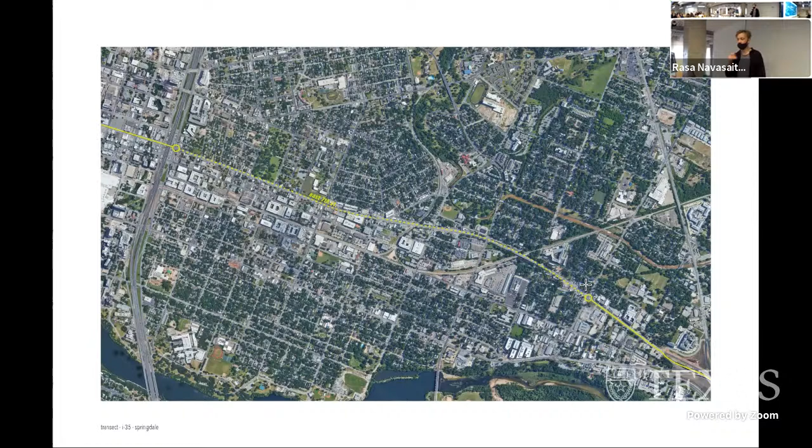If you look at the condition of East Austin, we can see this idea of urban ecology being challenged already, looking to the north side we see this more residential area, which is covered and shaded by trees and has plenty of landscape. And then to the south of East 7th, we have a much different condition where current densities are happening, and we're beginning to lose that landscape.

So we wanted to really challenge the students in the studio to begin to integrate that sort of landscape condition we see here into a denser condition.

And so as groups, the students went through and did different types of site analysis, looking at where these natural voids were happening, and where humans had access versus not having access within East Austin.

And then they would also model these case studies, looking at how do we introduce these voids into a typical housing unit or apartment. And so these are different studies from the students.

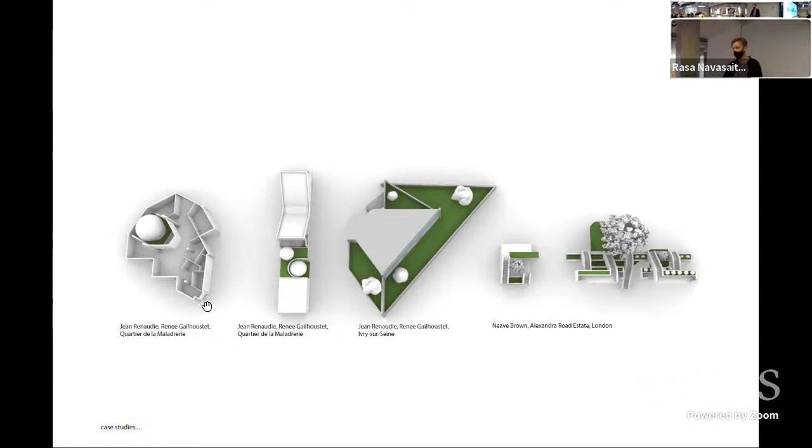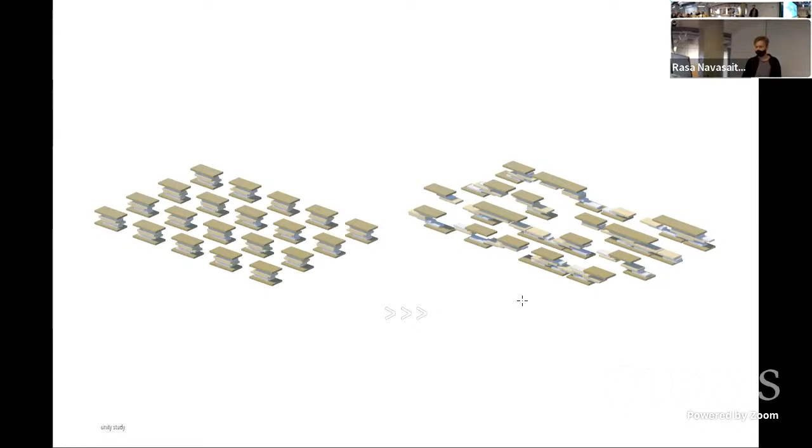And then we also began to introduce them to Unity, which is a 3D software that essentially looks at these different building parts and begins to move them, using a script to see how these relationships happen, so we can consider these parts as public or private, and then using the 3D script, we can begin to understand how those spaces interact. So the students did a little bit of studying within that and some sort of research by design through that.

It was more of a jumping off point for them. In the second half of the semester, we really wanted to focus on how we take those ideas from this digital, computational process and begin to translate it to a new type of building.

This quote by Mario Carpo begins to look at that. He talks about not designing a building using digital tools, but rather designing a building that could not have been designed or built without them. So we begin to consider these building parts as almost like the different letters in an alphabet, and think about how these letters or building parts combine to create an unlimited amount of variation and new types of housing technologies.

We can see that here in some of the students' work, where they design these building parts, and then their studies aggregate to create new types of housing that introduce natural voids and landscape. These studies would later go on to develop into a more realized building project.

So yeah, that's it. Great.

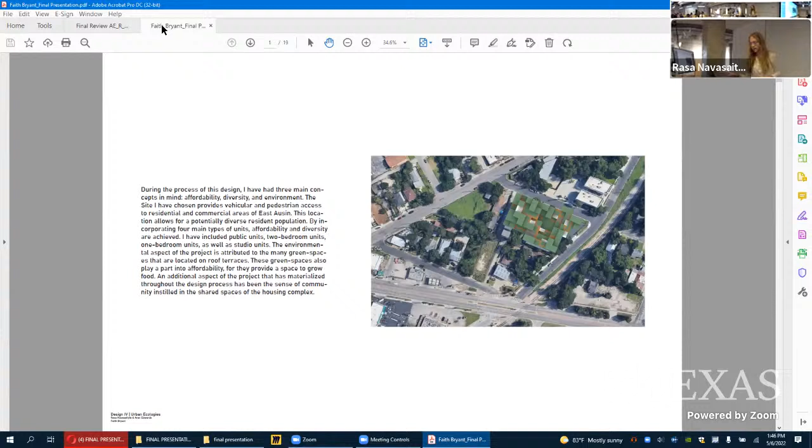I'll get a bit more into the site in the next few slides. This is just a rendering of it sitting on a Google image.

So the site I chose, I wanted to set my building in a place that would combine those two and sit right on the axis of the private and public spaces.

The site I chose is on the corner of Northwestern Avenue and Coronado Street right here. I chose this site because it has good pedestrian access, vehicle access, it's right near a commuter rail, and it's right across the street from the HEB, so they've got good access to things that they need.

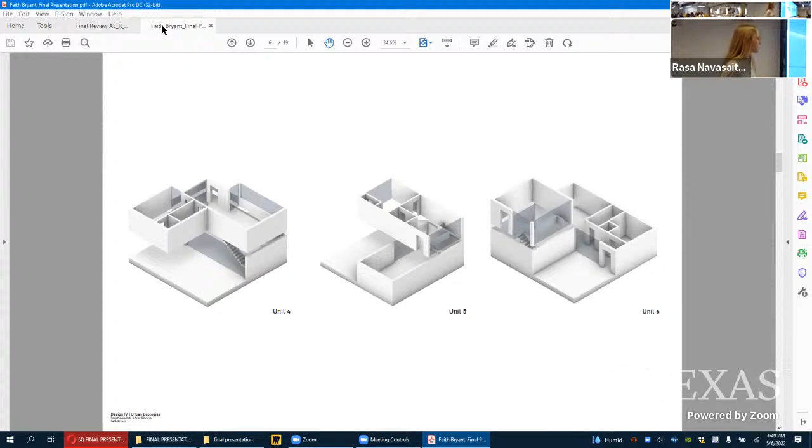These first two are both studios, and that third unit is a one-bedroom. I have nine different unit types, and they're all repeated several times, but the interiors are unique to each unit based on where it's located in the mass and how the windows are facing and where the doors are located based on its placement.

I have a variety of studios, one-bedroom, two-bedroom, and a couple three-bedroom for some larger families. That's how I plan to accommodate diversity and affordability. With some smaller units you have lower square footage so you can afford that better, but also with bigger units you have a more diverse population that can live in these spaces, from a single person to a family of three or four people.

So this is just all that I have up there if y'all want to take a look at that. That is just downstairs of one of the units I have.

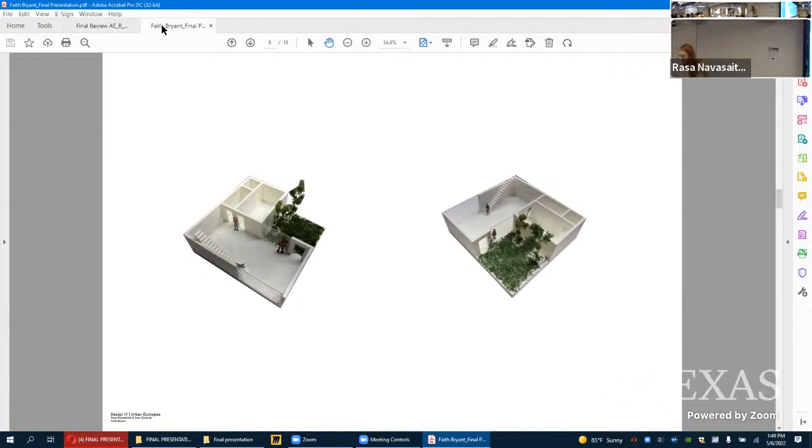And it's a courtyard, central green space area. I tried to incorporate as much green space as possible.

This is just a section of the build on that side, and the units are placed with the modular dimensions. They were easy to kind of place like Tetris pieces. And down here I have my elevators and main circulation core, and it goes up to each floor.

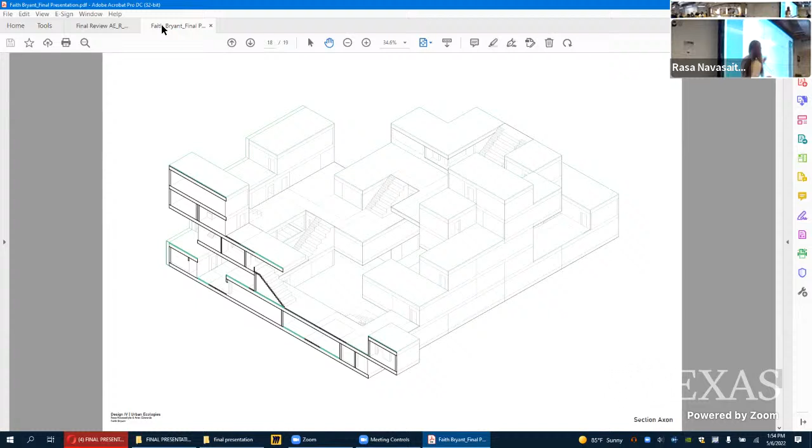My next section cuts in the opposite direction, again showing that courtyard on the bottom and the different levels. And here are two experiential views that still need work, but okay.

Thank you. Is there a site plan? Yes.

It's missing the trees, but I placed them here. There are trees along right here, and then I would plant some more.

Are there sidewalks in the public thoroughfare? Yes, I believe that's what these are. And adjacent to your site, are there sidewalks? Oh yes, there should be.

So the model is just half of the project. Yeah, this is just a chunk of that. And is it how it looks in 3D, or maybe in the middle—does this terracing go up again? Yes, so in the middle there's a courtyard that goes all the way to the bottom, and then it builds up on the outside.

How many total units? 27. Is there parking as part of the program? No.

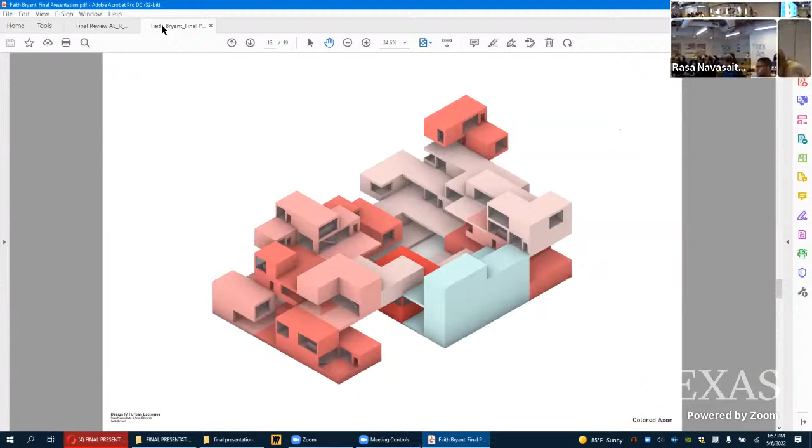Yeah, that's it. Go to the first floor plan. There you go. Okay, so it'd be nice if you had shown the intersections of the streets on the ground floor plan, so you can see the streets and how they kind of wrap around your project.

It helps us evaluate the project. I think a lot of the success on a project like this has to do with the relationship with the ground. It seems as though I don't know how much value you gave to that, how much of it was criteria that played into the project, but whether or not it was an assigned criteria, it's one you have to bring to your project.

Because you could have a project that's otherwise successful and clever in the way you aggregate and make connections between units, creating public spaces outdoors, all those things, but the success is going to be based on how good this thing hits the floor, especially in an urban context like we are here. It's a city, so you have fairly long walls on the sidewalk.

So imagine one way to help is to think about things like imagining yourself walking down the sidewalk. Right? You want something pleasant, don't you? You want to see people drinking coffee or whatever, a bakery, a cafe. You want to see life on the ground. But you don't want to see a long 20-foot wall and opening, and then another wall and glazing.

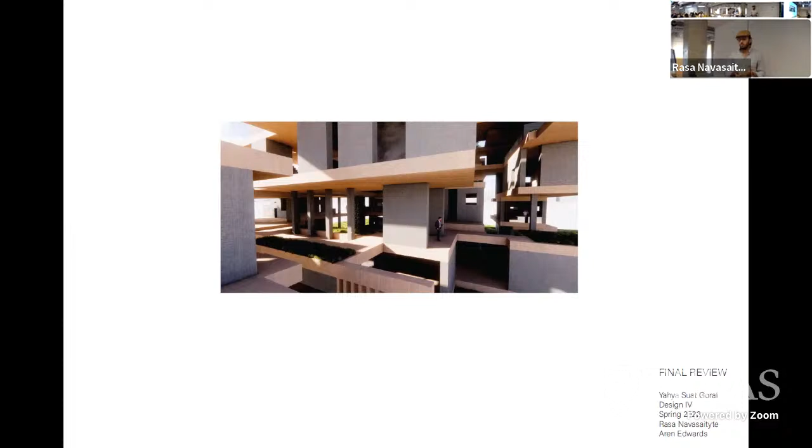Our project was about urban ecologies, and we had research at the beginning of the semester about the site plans. We were researching how the site looked in the 1900s and 2000s, and then we decided to pick a site and work on it.

So I decided to pick this site right there. There was a construction on that site, which is stopped right now. Nobody used that site, and it was nearby 7th Street. That's why I decided to choose and work on that site. Also, since we were supposed to build an apartment unit, it is a very nice spot to work on.

A little bit about the research: at the beginning of the semester we had to research some sites in the downtown Austin area, and our site was 7th Street. We researched the public spaces and commercial spaces, like the buildings and residential buildings, and then I decided to choose the place where a lot of commercial buildings were.

This is the unit and site relationship. This part is 7th Street, and they're all apartment buildings nearby. Also there was a school, the college — I can show you from here — there is this Huston-Tillotson University. So since there is a college in this site, I decided to put my apartment unit there so students can live there as well.

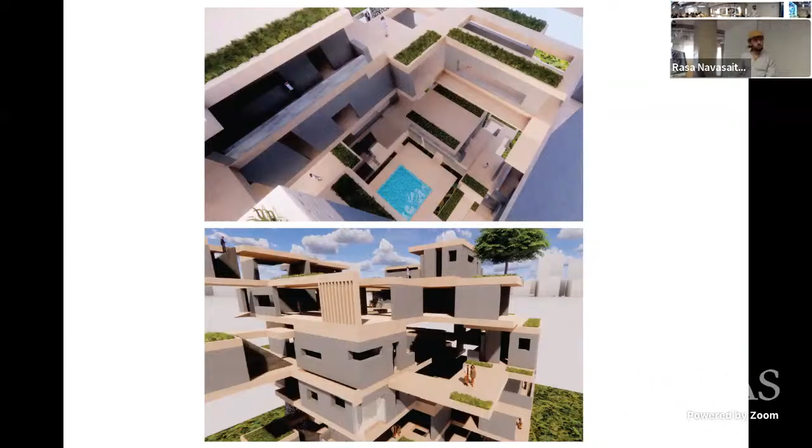So what is your basic unit, the unit that you multiply? The units I'm showing right now. Okay, I see a lot of them, trying to figure it out. So this was the main player? Yeah, I'm just going to show you the second one.

At the top picture, you see the top view of the building. My main purpose before I started the project was putting a lot of shared spaces so people can meet and gather together rather than just solid units. So I have a lot of shared spaces in this apartment, and also singular and two-king bedrooms as well.

So these are just some shots. As you see at the top picture, there is this singular unit, and behind it there is a two-unit apartment as well, and the one at the bottom is just a gathering space and the apartment office. I was just thinking about it, and this is just the outline of my apartment.

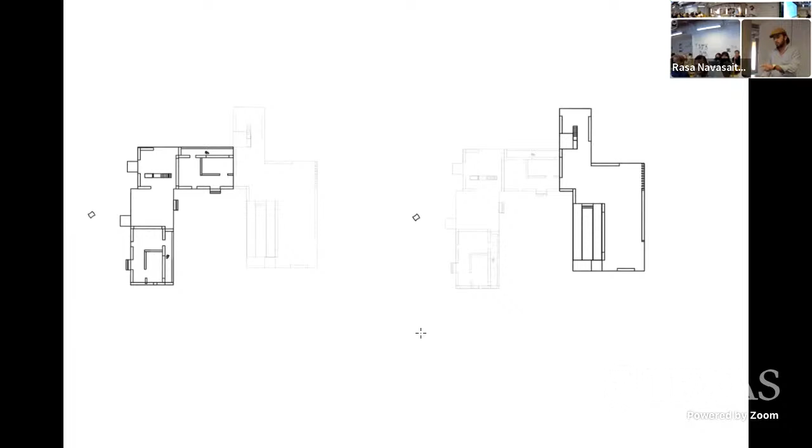Is the public space like a living room? Or is it more complicated than just assigning rooms? The thing is, here there are just singular units, so everything is in one unit, just one for one person, each unit.

Is the public anyone can go there, or is the public part of a private unit? So anybody can go to the public space, and the private space is like a hallway leading to the living unit. You might just call this communal space, but you have to describe it really succinctly so people understand the distinction between the two.

Did you build any physical models of this? Yeah, I have. This is the study model. This is the public one, and here it starts the private ones.

These are the section cuts. This one is the section cut of the building, the axon section cut. As you see here, this is the public space, this is the public space, right here, public space, and there, that's how I connect the private and public spaces. This is the section cut that I got from this site.

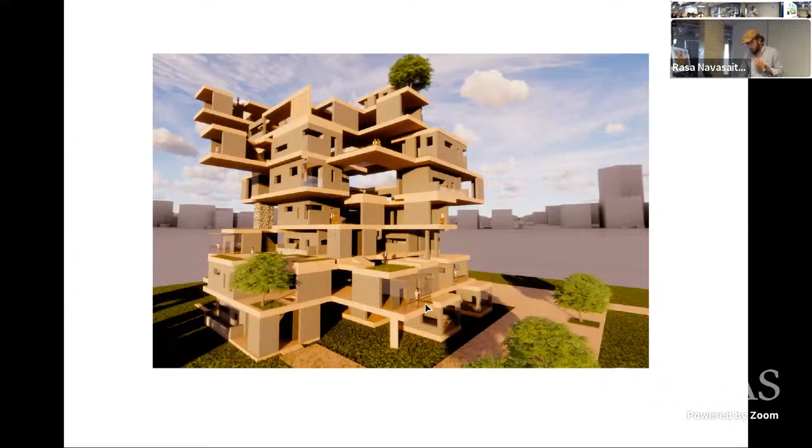This one is just the perspective image. Hang on with this for a second. When I'm looking at this, I'm trying to untangle what you or your machine were thinking as you were moving these pieces. Is it about taking the horizontal unit and shifting it off a certain amount in order to give you the void in between? I'm just trying to understand what you were thinking as you were moving these pieces.

I had two types of units, and I was just playing with them on each floor, putting them in different places. In the emptiness, those empty places, I made them public, for people to gather. The green spaces, I put them to have more appearance of a gathering space. And this elevation right here, you can see this is one of my units, and here you go to the next unit, and these are the other units right here.

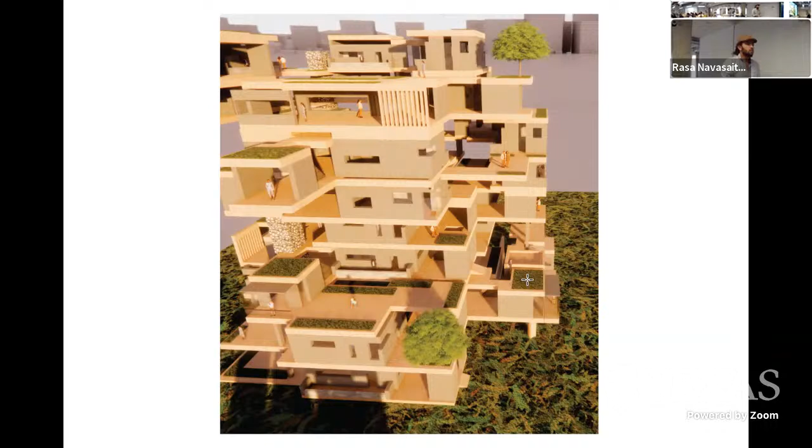And in the middle, as you see, the middle of the apartment is empty. So do you have an image that you can tell us what you were just telling us? I think you're generating a lot of very interesting relationships. It seems to me that it's hard to figure out which is the one that you prefer, which one do you like, which one is working, which one is not working. I think you have a lot of possibilities, but I want to know what you think.

Okay, so this is the top view of my model. As you see, my human scale here. This is the public, that's what I was trying to say. And there is this stairs goes up, and this is the private space. And when you go here, there is another public space again. And when you come here, there is another private space. It goes circle. So here, this is the public space, and you go all the way there, there is my private space too. And this is more about like for people to gather, basically, instead of just whole apartment.

Honestly speaking, it's very confusing your presentation, or how you represent the project. You're jumping from kind of renderings or subjective views to a site plan, to a diagram, to a plan, which is not really a plan. The drawings are very incomplete. Like when you have the plan, even the walls are not hatched. They're not embedded in the context. I don't see how your project actually sits on the site in a plan or in any section. The renderings, the part where you cut it, is even not showing the full building. The perspectives are where like a drone would fly, but not a person would stand. It's very difficult to understand actually the program, the space, and the observation for that project.

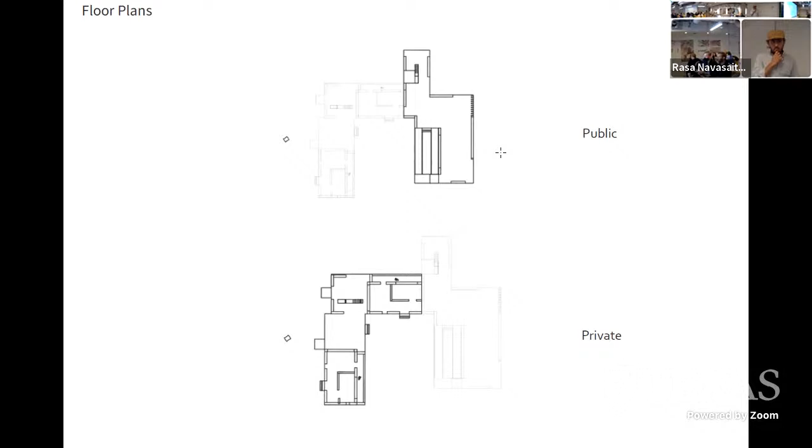I think we're just lacking context. This is essentially where we were three weeks ago. You got to a point of making a composition that you liked, and then resolve it. So I think you just need to push it further and think about how do I make this more realized as a building.

Like John was saying, just start drawing in people. How do they experience it? What's happening in those spaces? Right now it's just these two foot thick walls that are holding up a variety of different spaces, and it's a little unclear as well.

But look, even as, I mean, it's clear as an open studio, so it's kind of messy. I'm okay that it's not 100% works because of the complexity. I'm not okay with that - I can't read the drawing.

So when I see a plan where the stair has nearly the same width as a wall, it can't work. As long as the basic elements look like they work, I can assume you can figure it out later, that it needs more projection. But the ideas are there.

This one, the 3D sectional cut, has a great quality, like this courtyard and so on. So when you show this with the swimming pool or this entrance area, you put out some atmospheres. But again, when you show three different site plans, they all have different orientation, different shading, and also different geometry. Then it needs more care in simply elaborating the drawings.

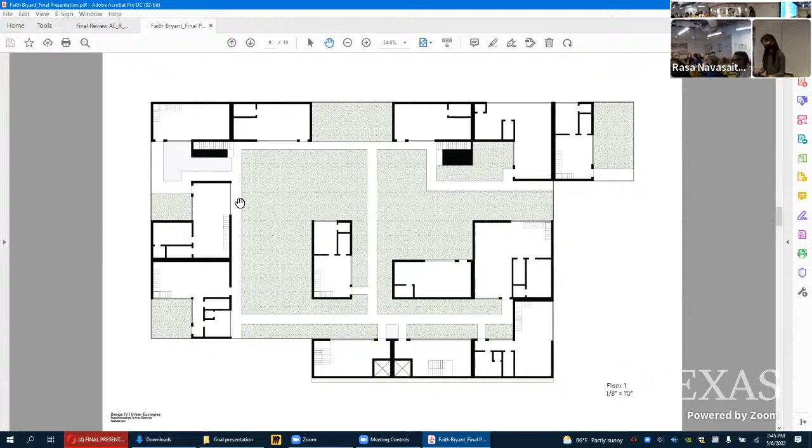That's how, sorry, I'm saying it louder so they can get the message. Yeah, rolling your eyes, I wasn't actually yelling, just saying it loud enough so everyone can hear it. I tell my students that all the time. It's easy enough to get.

Yes, maybe at a minimum, tell us where your drawing is so we can figure out, it would help us, because I've been trying to find them all along. It's helpful, because our job is to see the big picture, but we only can see one at a time on the screen, so this is a challenge.

But you gotta figure out, I don't remember them all, but hey, go back to image number 14. Which, before you start - sorry, the one thing about Zoom that surprised me, reviewing projects on Zoom, is having a second monitor and the entire presentation on PDF. So I can see the image the student wants me to see at any given moment while they're speaking, and I can scroll through the whole thing. And at the end of the review, I said, go back to image number 5, and the whole thing would come together. It was actually like an amazing antidote to the limitation of the single image digital presentation. We don't have that right now.

It was great, like cinema. It was amazing when you got the whole thing coming together on the screen.

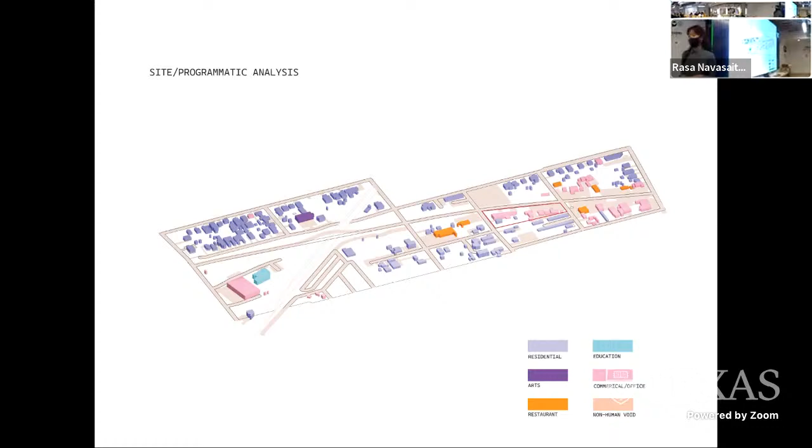So I have this initial concept, I like to experiment and play around with in Unity, and I have this idea of shifting spaces and overlapping circulations, overlapping private and public spaces. This is where I came up with this physical model, and basically some overlapping areas could also become like landscape or dirt space for planting - this is just a conceptual image.

And how I started differently, I started creating shells that can slide units in. Okay, it's kind of not moving, but I create shells and units, and I create a diagram of constraints

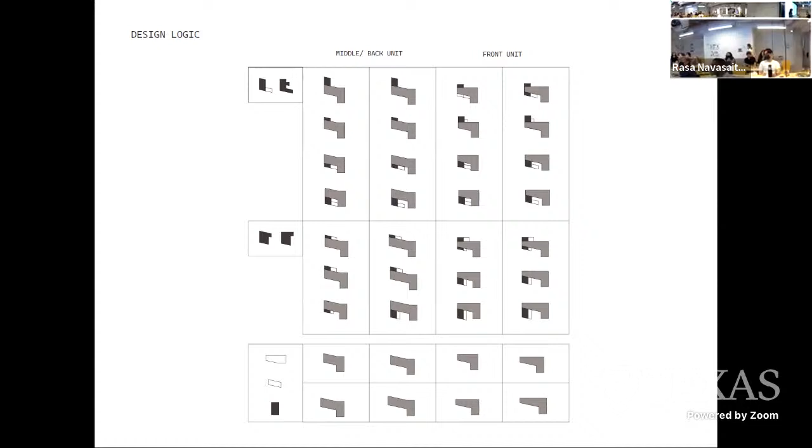to form my aggregations. And these are my units, and those light gray ones are my shells. And I'll see what it presents. Oh yeah, okay, it's moving right now.

So basically it moves like that, and then it's how the units shift into my shell, and that's just a top view. I couldn't really get into work on Illustrator, so this is how I form my aggregations

by shifting plates and units. So my units come after I created my shells. And that's my first floor plan that I came up with, some main circulation coming from both sides, whether it's facing the streets or the residents in the back.

I have a total of 5 floors where I have main two clusters, one on the left, one on the right. One is a little bit larger, and the cluster on the right stops at the 4th floor.

So here I have my second floor plan that has an intersection of the plates that creates more public spaces, and then the 3rd floor where it's mainly units - oh wait, I have 2 third floors, sorry that's a typo. And then my 4th floor, some greenery space, and my 5th floor. Sorry, those are typos.

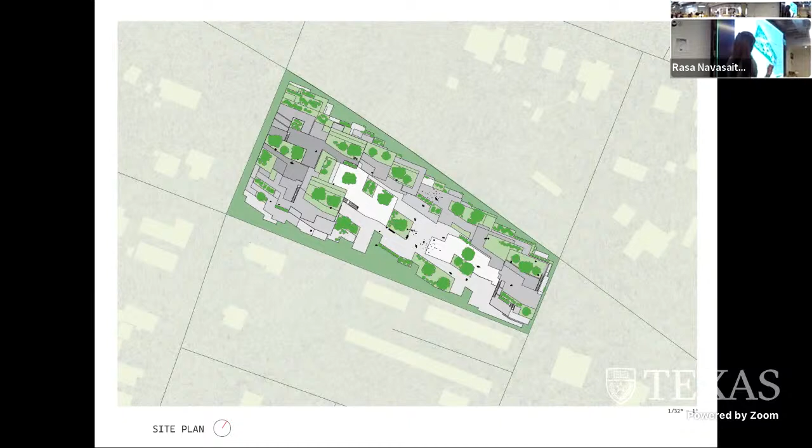And as we move up the floors, it becomes more private, but on the 1st and 2nd floor those are mainly public. And this is a site plan that I created just to show different elevations, that as you move up, the shape becomes darker, the gray shape.

And that's my overall aggregation that I came up with by shifting those shells. And I did a section cut the long way, but it's not fully resolved yet because I figured that

the difference in shifting my shells creates problems when I design my units. And that's the section of the shorter side.

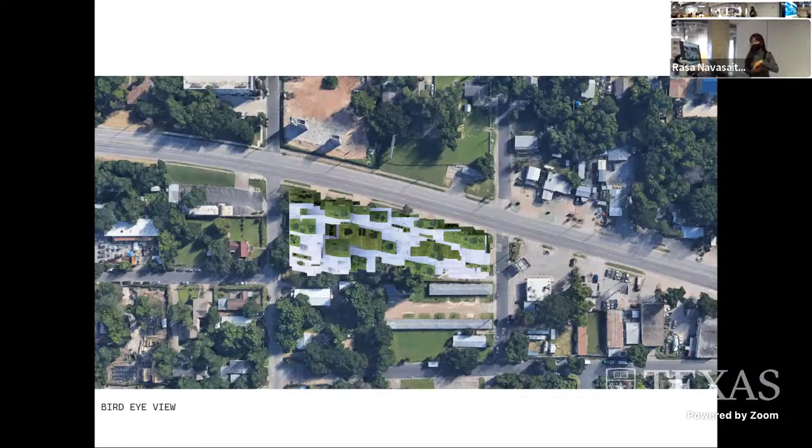And some detail shots that I have of potential activities happening on the 2nd floor. And the last image of some upper activities that you can sit and chill. And yes.

The model's a little different, is that right? Yes, it's just a study, like how it came up - my final aggregation. It's a little earlier and you have a little more density now, right?

Oh, this is half of my site. This is half of the size. They didn't have the model. It's twice as big as that. Yes, it's quite a long- I have quite a lot of units. I realized my site is pretty big.

How many units do you have? Oh, okay, I have 50 on the ground floor, and then 30 something, and then 7.

Do you have a plan for like a unit type? No, like beds and window, kitchen, restrooms and all that - that's something I haven't figured out yet.

How big are the units? Oh, units range from like 500 square foot all the way to maybe 900 square foot. So, I mean, it's reasonable sizes.

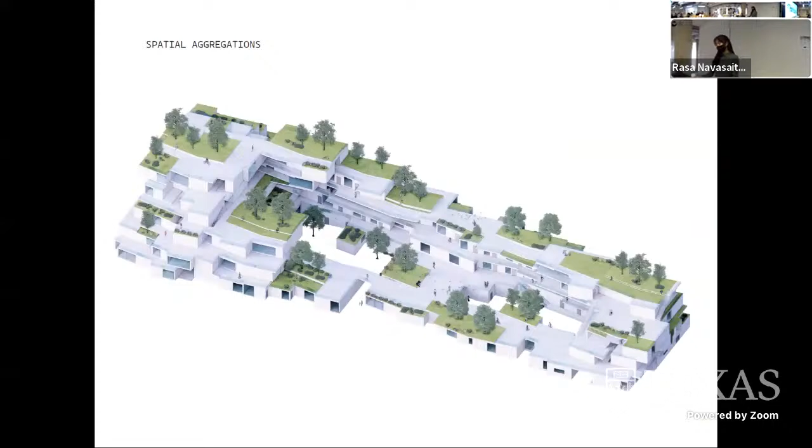One thing I developed on my ground floor plan is, I do have regular units, but I thought of something that can welcome people in rather than prevent them from coming. So I have a small library at the bottom, in a large space at the intersection that doesn't get much light if units were there, and then I was thinking of having a daycare in the middle.

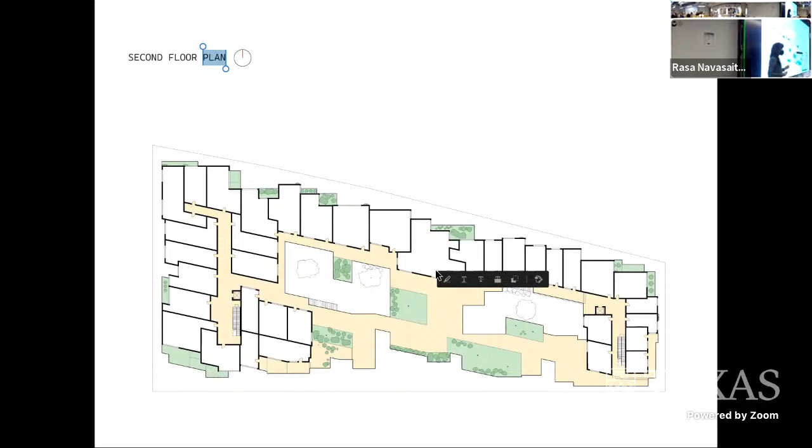It's very important that you say this. And I think even the first floor, I wouldn't see them as apartments at all, because people would just be crossing right in front of your main window.

On the first floor you have one-side-ventilated units, which I would always avoid—it's not ideal because you get very deep floor plans, dark everywhere, and in terms of privacy people just walk in front of the window. In reality you'd have the curtains closed all day because you don't want people to see you sitting on the sofa.

But if that were an office or a small shop, I'd be happy if people looked in and maybe stopped by my architecture studio. So you could easily change the program, or change it with the floor height, offering more mixed use, which would probably be more appropriate.

A lot of really nice work here. I appreciate that you know what the density is and are addressing it. Tell me a little more about these investigations.

Yes, these are my early studies. Originally I was interested in shifting the plates and how that shift, along with the stairs, could lead into planting or seating areas within the units. That's where I started, along with thinking about a public space that could create this kind of circulation.

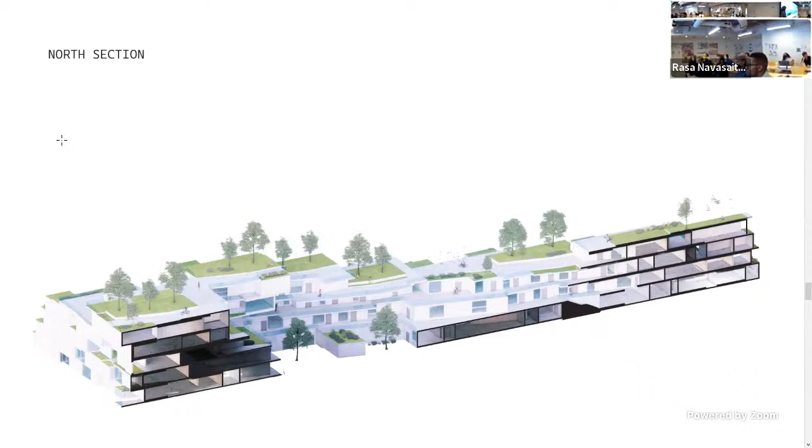But I like the sections just as a kind of drawn aesthetic object, I think it's quite beautiful. It could be a bit more informative, so just stretch it out with time. As I said previously, it would be nice to show the streets, how the thing hits the curb, the edge, and then maybe zoom out on that one and draw it regularly. But this scale of the long section shows a lot of nice intricate aggregations going on, there's no sameness in the projects.

I always like the 3D section, if you make it really 3D, now with computers, you can cut in 3D like a flat shot. So this is actually, when you really see it more as a landscape, when you open up the spatial complexity, and then you develop it really as a landscape, three-dimensional. It's really understandable how those movements go here for the project. So don't cut this really as a straight thing.

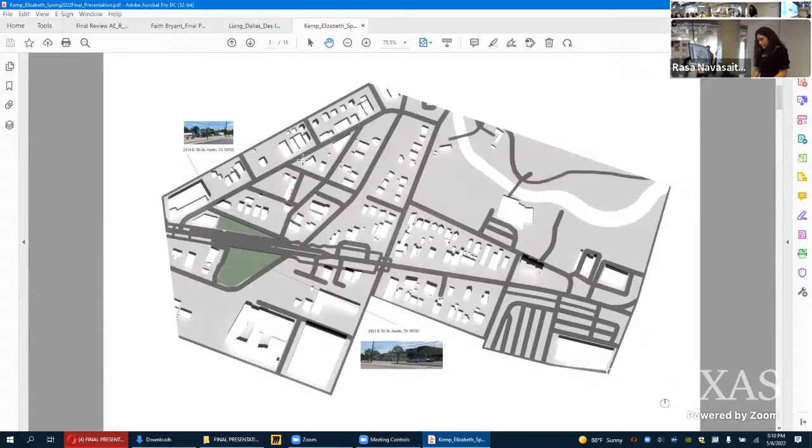I don't think this is the right one. Do you have the words? No, but I don't think this is the right file. I'm just wondering if he has the box open. Oh, here it is, okay.

Can you download this? It's just loading. Oh yeah, just downloading it. That should already be downloaded. Unless you uploaded it again. I think it wasn't the right one because I was missing one of my pages.

Okay, then just go to the downloads on the bottom, right here. Or do I go for the newer ones? Downloads, yeah, okay, perfect, there we go. There you go, okay, continue. Okay, so we got that working.

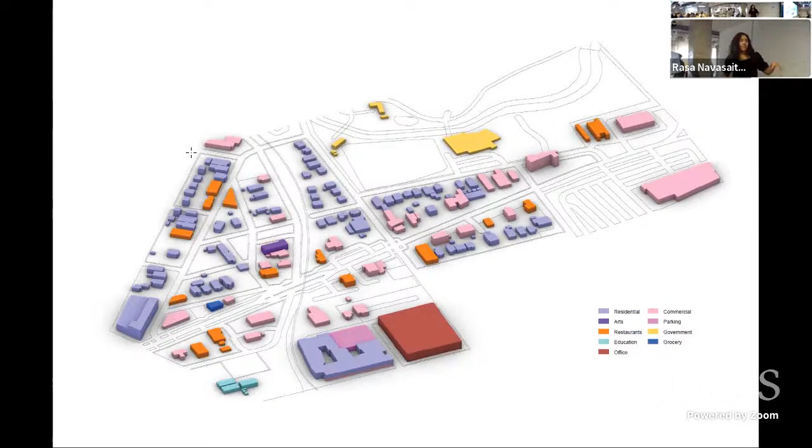So first I want to start off by talking about my site. I had the same zone that Faith had earlier, she went first, and she brought up the fact that we have a more residential northern side and a more commercial southern side. The point of my project was bridging, connecting these two sides of East Austin, and this program diagram came in handy for that.

The site I chose ended up being, pretty much, two different sites that cross over 7th Street. I thought it was a good area to pick because there's an elementary school down here in the south, cut off to the left. And then you have all these homes behind this bigger site, so it's replacing a gas station, a pawn shop, and an auto shop. There are a lot of them in this area, so I didn't think that would be too much of an issue.

When thinking about our design, I went back to the original concept models we had. In the Unity model we did, I was playing with plates and created these modules with random space inside, and this very direct type of circulation that wrapped around, and I made different connections with that.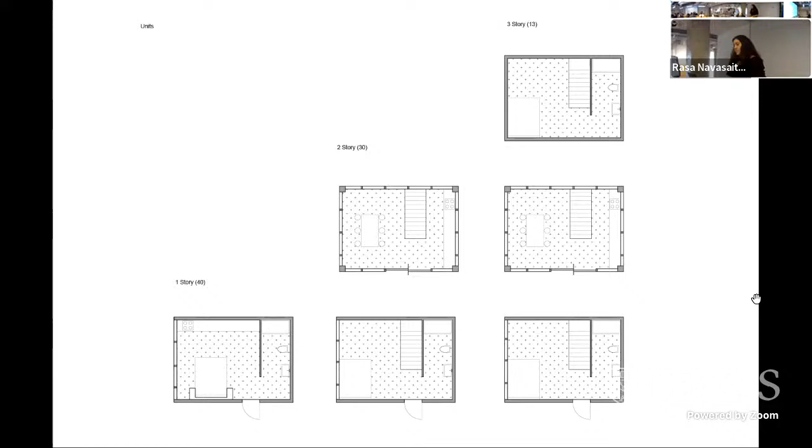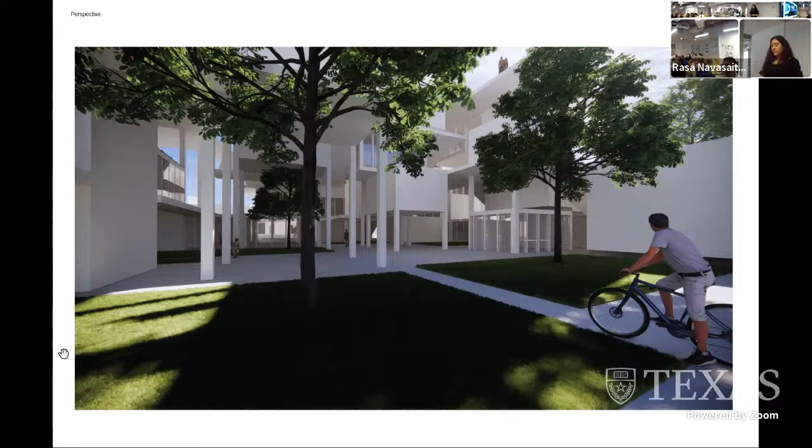How tall are those units? What's the space and what's the height inside those? The units are 17 by 22, and then the height is 8 feet.

8 feet? Are you sure? I think it's 8 feet. If not, it might be 9. I had to put some depth in for soil on some of these, so it might move things around. 8 or 9 works. Well, I'm looking at the proportion of the volumes. So you said it was 17 by what? 22. 17 by 22 by 8 would make them half much shorter than that. It could be 9. Okay, anyway. Yeah, proceed.

And then, oh, I went the wrong way. This is a perspective just approaching that coffee shop, and that's where the open space that I showed on the plan was. So some of these are raised, and it creates this tunnel where you can go through the apartments and reach the area behind the site.

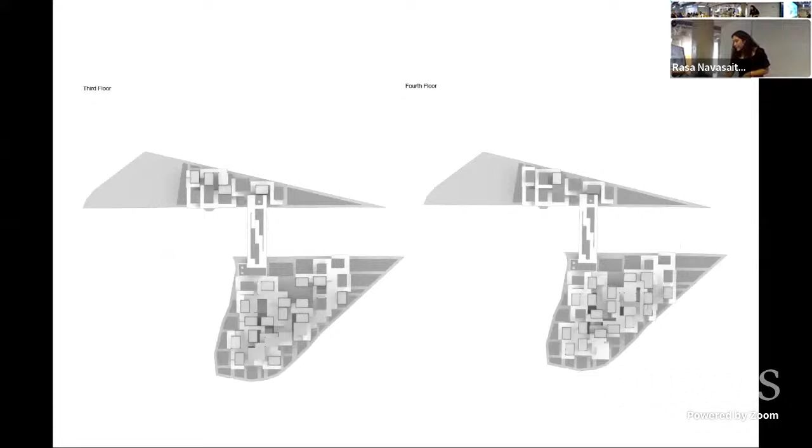I think that's the next step I was working on, because for some of the rooms on my plan, I started playing with interconnected spaces, but I just never got to develop them now. I did mess around with blending some of these together, and having some spaces overlook other ones, which is where I had maybe a section.

There's something really interesting about the hyper legibility of the modules. Back up one, please. This is the one where I'd love to see some of this erased, so that it has an edge that's missing. There's a little mini balcony, if these things actually connect to the other and start to connect vertically, some of these might read as just weaving. Go back. Yeah, there you have it.

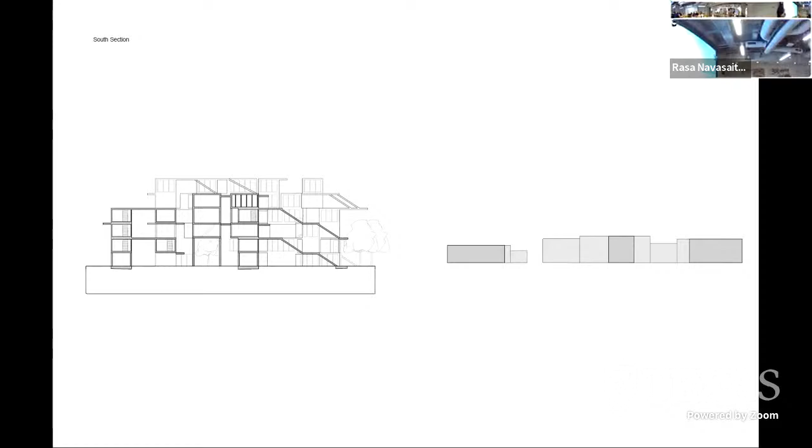This already doesn't look modular anymore. Outside, yes, but inside, not yet. Why is it not inside? Well, I see it before separating them distinctly. That's not inside. That's outside, why can't you use it?

Wait, sorry, what are you saying? Well, for sure you're using the space here. This is super cool, the courtyard, isn't it?

No, courtyard space, yeah, but my concern is that we would get a kind of claustrophobic modularity, where when you're inside the space you feel like, dang, this thing's small. So you have the opportunity with everything you're proposing to provide the antidote. It's like I never feel trapped in a corner, because I've got a piece of space that connects to the glass floor where I can see my room up above, but I still have some acoustic separation, and I can also see out horizontally at any moment inside any space. So I never feel like I'm in a box, even though, yeah, I'm in a box.

So there's an experiential counterpoint that you're providing. You've got that opportunity in this strategy that you're using right now. I think that'll help you avoid stacking and shifting also.

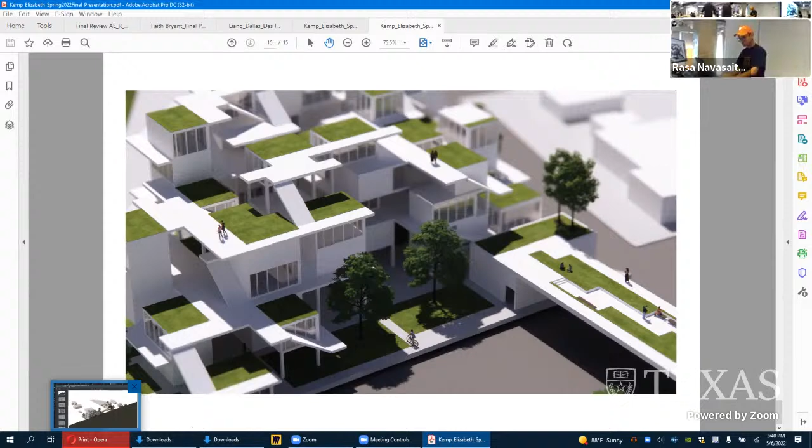Somebody come and help. Do you have box open, Baron? Yeah, it's on the bottom. You got a print, so print. I know, it's on one of those tabs somewhere. One of the other people too? Yeah, can you just take it and download them? Let me bring one of these out here. Okay, does that come off? Thank you, Jeremy. Of course. You want to stack them all? We can.

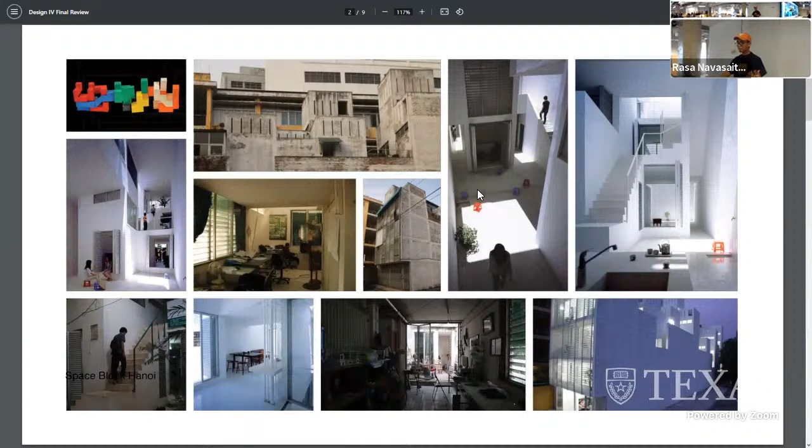I love the part where the light coming in, the little spaces, people sit here - like my auntie and my uncle sit here and gossip, or play cards or something like that. So I wanted to see how I can use computation and code to manipulate a cloud of modules and generate a form.

It was fun and all, but I think I couldn't control the code to get the form that I wanted, so I went completely opposite. Before that, the form that I got from the code generated something that felt a little too big, so I had to take that one.

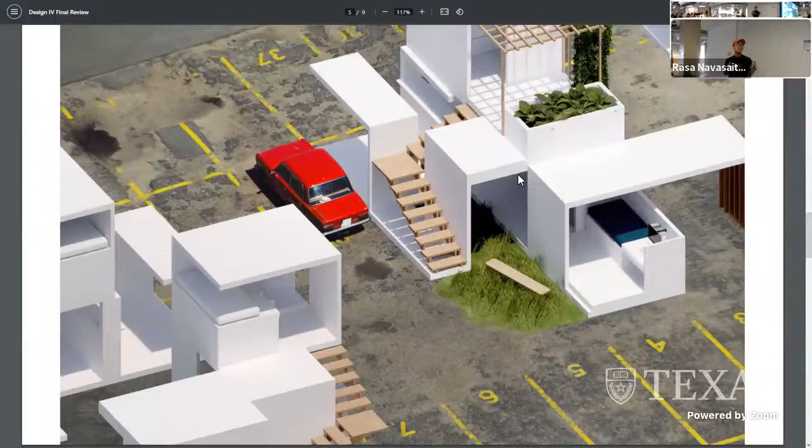I felt like it was a little too big, so I went with smaller modules that are more individual and personalized. It feels like it drops in and lives by itself on the site, almost parasitically, and that felt a little too small. So they start aggregating and just take over like a parking garage, and I felt like that scale is something I want to pursue.

Next, let's find a site. It's 619 Tillery Street, an empty plot of land in the middle of a residential block. I felt like, since there are other people living here, let me occupy that space. The building ends up being half the lot, and the other half is just green grass space. You walk along the street and come into the grass space. If you're visiting a friend in another part of the building, or if you're part of the space, you walk along the sidewalks on both sides and enter your unit. That's 619 Tillery Street, and I titled it 'That House.'

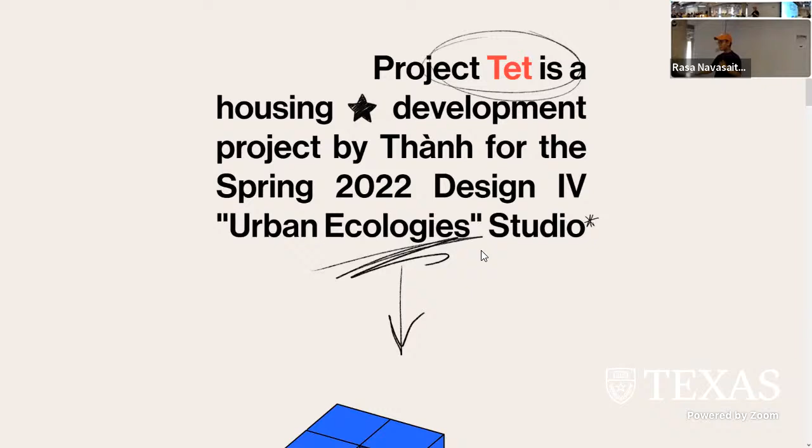Next up, Project Tet. Project Tet is a housing development by me for the Urban Ecologies Studio.

I wanted to play with Tetris, just for fun. Here are some blocks you can play around with. I like how they connect, how nicely they connect together, and how they can rotate. There are different faces, and I like how one can be stationary while the other reacts to it.

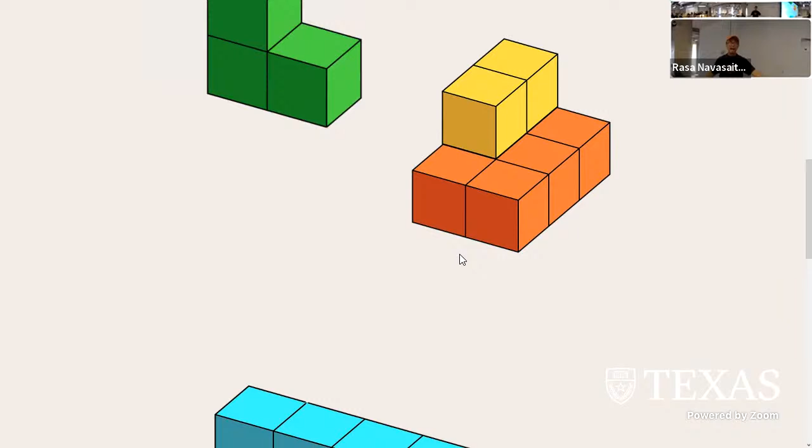So all of the units, 7 of them, start aggregating and forming the space. They end up being about 34 individual modules, forming 15 units. A few of them are communal units where you can share with another family or person, and one is just a circulation unit. So they end up being 14 livable housing units from the project.

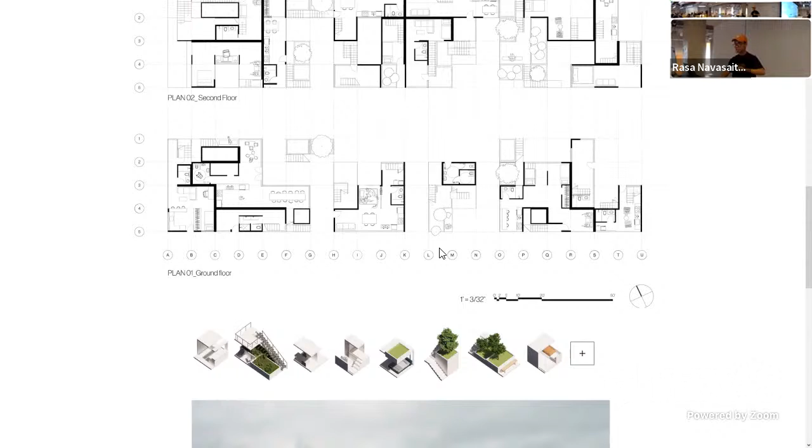They aggregate into this form, with 3 floors. The top floor has fewer units but a roof floor you can occupy. The second floor has a bit more units, and on the ground floor you see circulation running between most sides of the building. These units are made of 10 by 10 modules, which then grow a bit bigger into 20 by 10 feet modules, and they snap together to create this house that you see here.

The unit was designed to be a little more open, both in section and in plan, understanding that when you start stacking, you lose some of those open faces and have to cover some of them.

I want to repeat that the unit was designed to be really open at first, because when I start aggregating them together, I'm losing some of the faces and sharing the private space. So I close some of the faces, which still leaves enough open space, both horizontally and vertically, so that light can come in when it gets too dense.

That concludes the presentation for the Tet house. It's a smaller project, and I acknowledge it's smaller than a lot of my classmates', because I wanted to make sure the unit and circulation, and how each unit can connect to a green unit next to it, creates a more livable and enjoyable living experience.

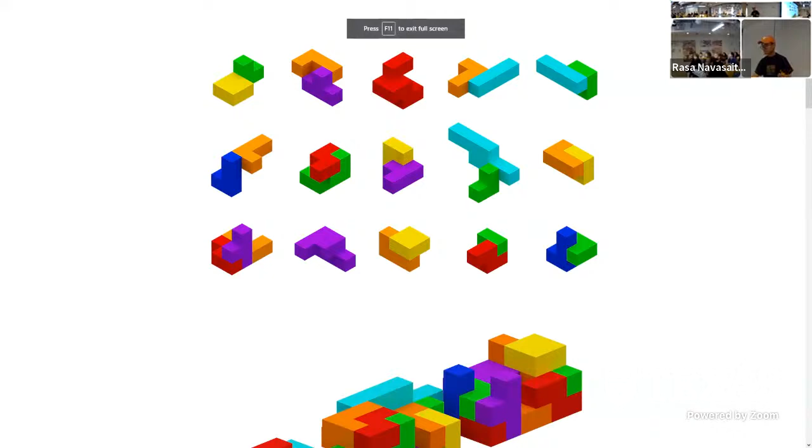Is there more? Yes, there's more. We can start aggregating them to be really dense. But like I said, all of these units are paired with a circulation unit or a green space unit, where you can get sunlight in and circulate around. This I call the Tet World, because it's so big compared to the site here, which is the Tet house.

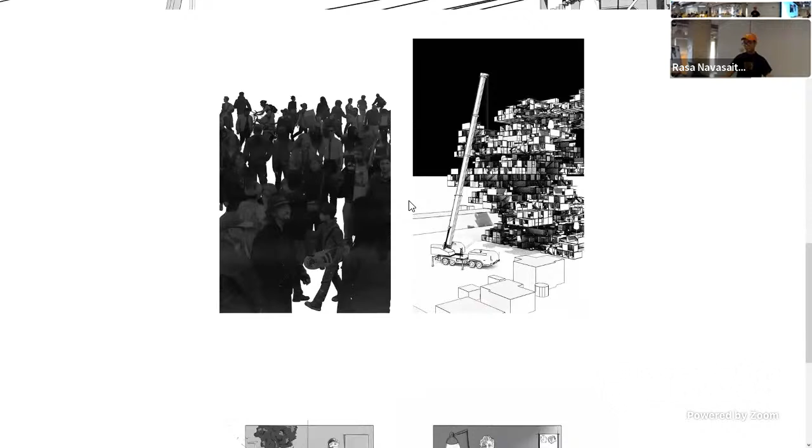I know the first reaction is that it seems really dense, but each unit has a connection to a circulation or green unit next to it to get open space for your personal living unit. As more people join, you get denser construction. I acknowledge the project may be a little too much.

I just want to leave you with the last frames of what I think is the core of this project: the experience of the individual person, who can personalize and organize the space however they want, because the modules are prefab, designed at 10 by 10, depending on whether they want a bedroom, a kitchen, or a special room like one for practicing piano. It's personalized for themselves, and they create their own experience living here. And I think that's all. Thank you.

You're so enthusiastic about what you're doing. Yeah, I think it's terrific. I love being in there, I like the creativity and the multiplicity of this 10 by 10 cube, doing all those different things. The only thing I would like is to maybe pause for a minute, just to look at closer scale, where some of these habitations happen from one space to another.

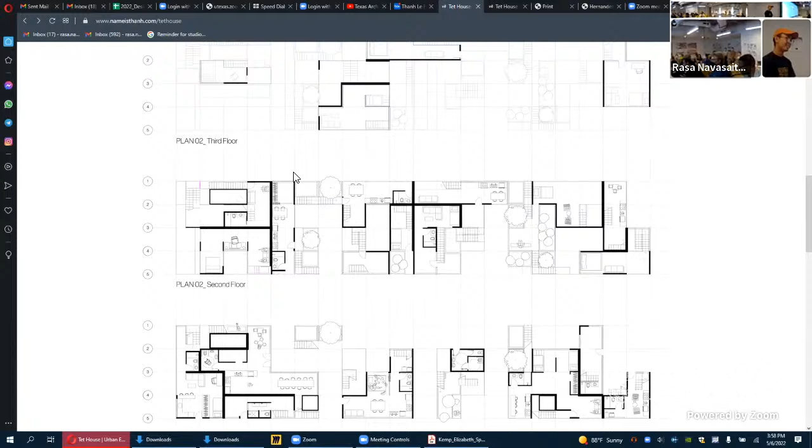The one thing I would look for is, when I see the Tetris blocks in the module, I think 'oh man, it's just a little block here, it's potentially claustrophobic.' But you've proven to me in plan that you very sensibly align stuff, the space feels — yeah, this is a tiny little space, but it feels like it opens continuously in that direction and that direction. So you provided the antidote in every case — even though you're in a very small space, you feel like you're part of a larger space.

That's consistent in plan. In section, I think you have opportunities to do the same thing, but haven't quite done that yet — units are still kind of stacked on top of each other, and there's room to make multiple height units that connect to each other in interesting ways. You could do the same thing on that level, in vertical section. Also, it doesn't have to end — the flat plane can continue, that can be covered, that's still part of the character.

It's a really good way to do it. The building I went to grad school in was the Paul Rudolph Art and Architecture building. It's concrete, seven stories tall, and impressive. It's like being in a bunker, but no space feels trapped or claustrophobic, because every space connects horizontally and vertically to something else. There's always that relief that's provided. In this case it's concrete and super solid, so it needs that counterpoint.

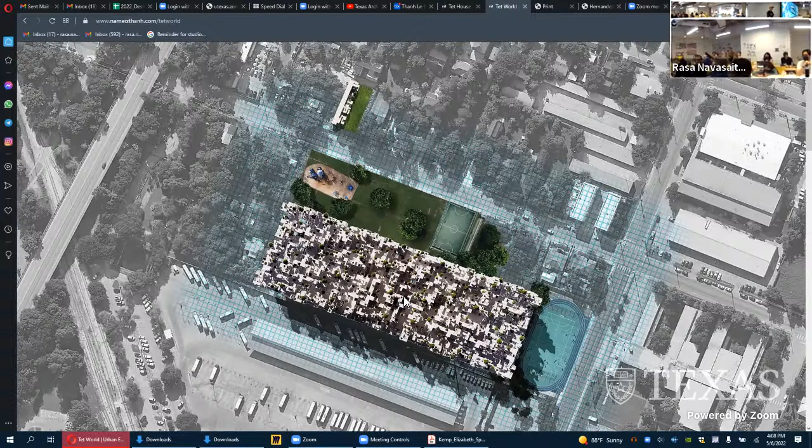Imagine seeing that - this is a speculative project, I'll leave it in that space. Just by reading the solid of the voids, you can begin to infer the walkability of the thing without so much actual drawing. It's quite interesting, that's a good way to think about it.

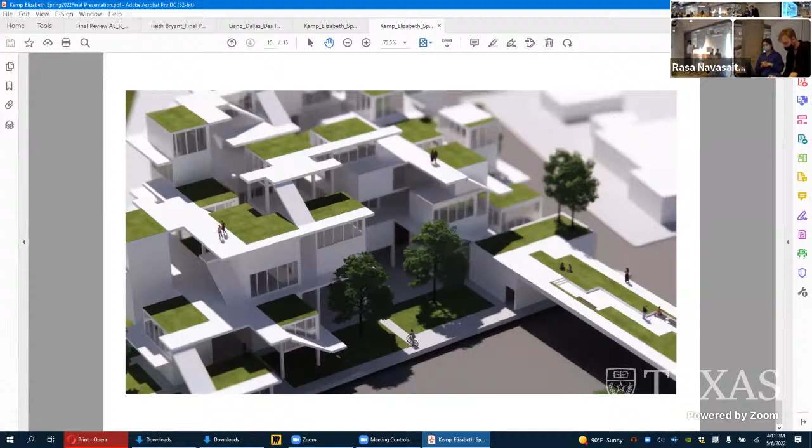Yeah, pre-upload it. It's just giant. That's great. It's not.

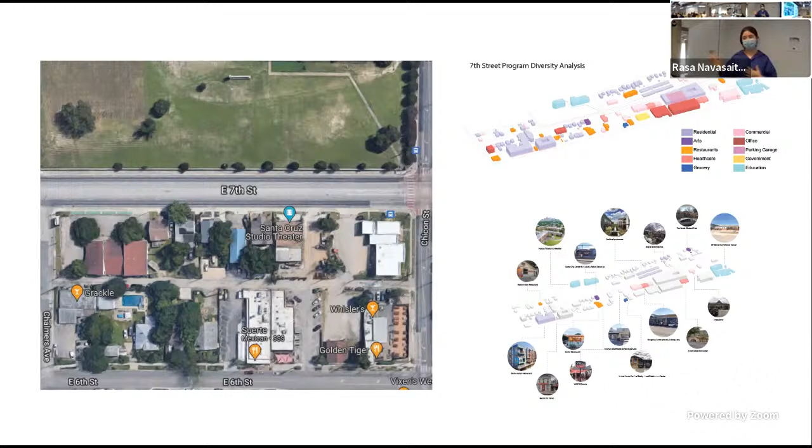Here are some views from 7th Street, looking at the site. I have 2 sites with an alleyway in between that connects them. That's 7th Street, and then here's from 6th Street, looking at the site as well. They're both under construction right now, so they were open and available.

Starting off with our unity studies, I began with this idea of cores, trying to find some relationship between vertical and horizontal cores, and relating the two in terms of what they could do spatially for a dense residential project.

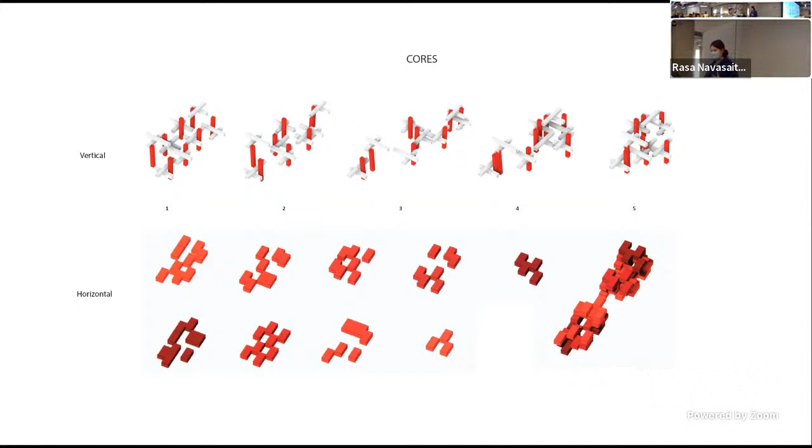These are some spatial studies we were asked to create, derived from the unity studies and the shifting in these cores. Towards the end is an aggregation I went based off of, trying to keep in mind a bridging element between the two sites at some point.

At the two ends, there's commercial spaces, a coffee shop and a laundromat. My intention was to have this at the base of 7th Street and over there 6th Street as well, creating courtyards as transition spaces into the residencies.

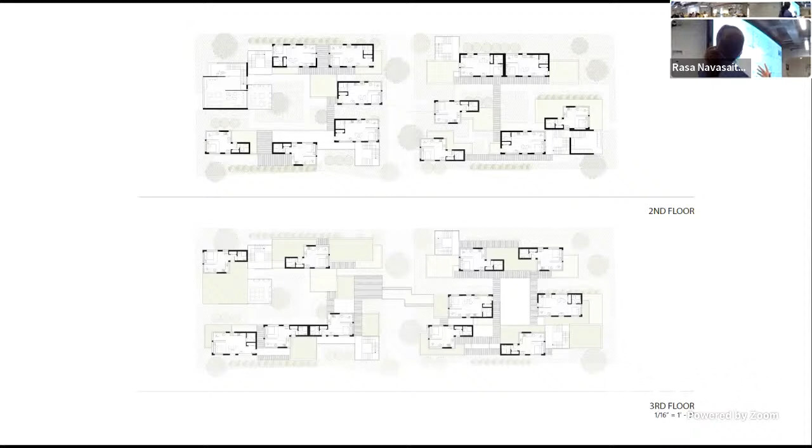Looking at the second floor, both commercial spaces are 2 stories. You start to see the circulation related to those spaces, as well as residencies that come up towards the center by the alleyway. In the center there's a bridging element that I'll explain further.

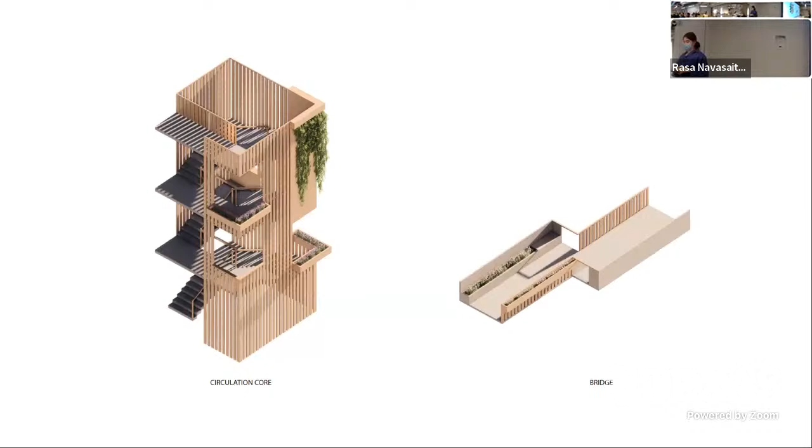Here are some renders of what I thought these spaces would start to look like, showing the circulation flow on the bridge.

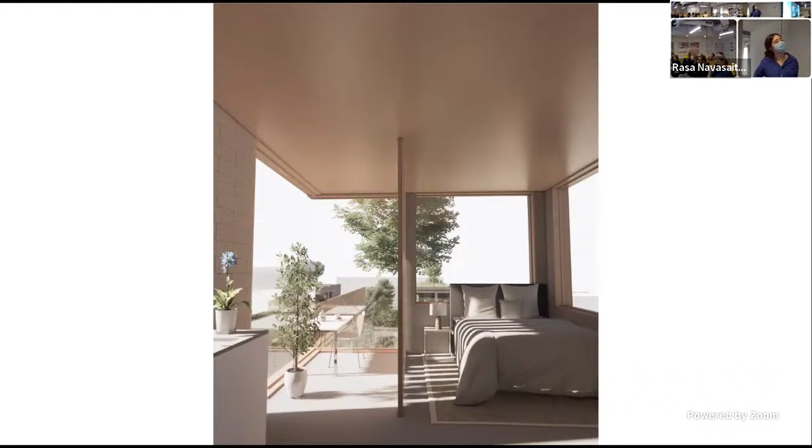This one shows those pathways I created with the shifts to the sides, and the courtyard space down below. And here's a view inside a unit, looking out at a higher elevation. That concludes my presentation.

Congratulations on a presentation, it's very carefully drafted, you present the view very well. Each drawing communicates actual intellectual content. For example, the site plan shows sidewalks and so on, but I really like the continuous hedge of concrete surface. You see how massive the percentage of paved surface is overall, which already sets up the motive of why you want so much greener space on the side with the building. It's great to see how you speak through the drawing, using it to support your concept.

One critique I have: I think the density should be much higher for that side. The building could easily be taller, but also I think one design mistake is that you work with containers. You could instead use the massing or porosity to combine those spaces, and you'd automatically get more floor area because you'd read them as more continuous. There would be easy ways to increase the overall concept.

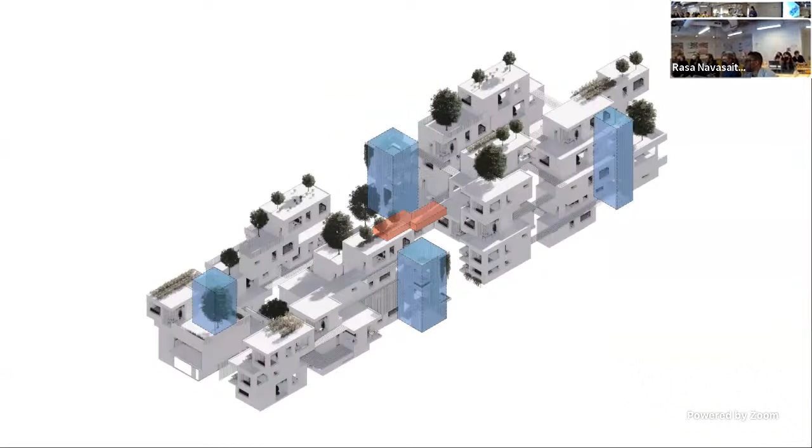Yeah, it feels too punched in. I mean, it could be more elegant just generally.

This is, if there were a next step - sometimes you have to move on and not go back, but next time you're working on a project and you've come a long way and things feel right and feel good, you could really obsess over making it pure in aesthetic terms. I think your project will really gain from that.

So it could be more beautiful, I think. And it has to do with the way the windows are, the scale of the openings, and the relationship of the proportions with its box.

I think the box also applies in its interior, but in the exterior the thicknesses are weird - of the floors and ceilings I had to do, because I do have some floor to ceiling windows, but the thicknesses feel kind of off.

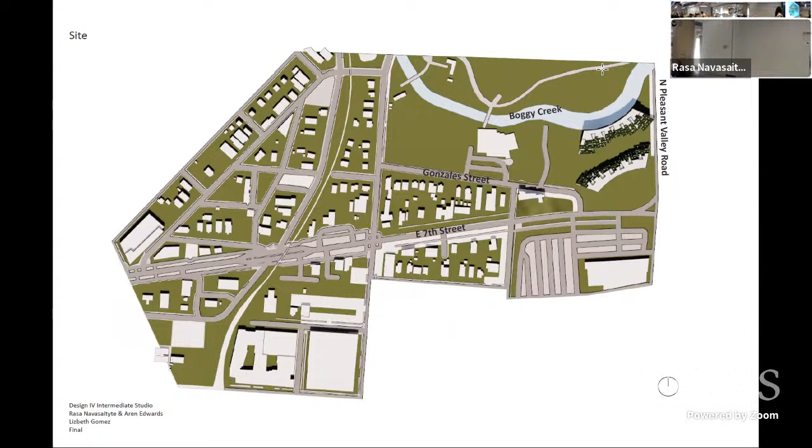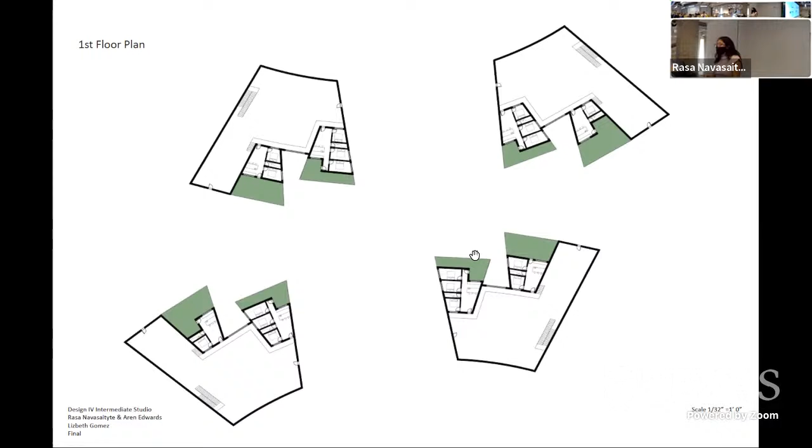And this is my first floor plan. As you can see, the bottom floor is mostly - I wanted them to use it as a public space for the residents, so they could have like a coffee shop or a gym, where they can both gather there.

And so we start seeing this hierarchy of units, and as you go up a level, you can see the movement of the units going upwards.

And on both sides, there's like this tunnel or cave-like inlet, which creates access to the park from the street side.

What's the why behind the plan? I didn't quite understand all the thought behind it. Go back to the plan. Yeah, what is all that between the stair and the space? What is this? It's public space, it's huge. Well, continue presenting and talk about it.

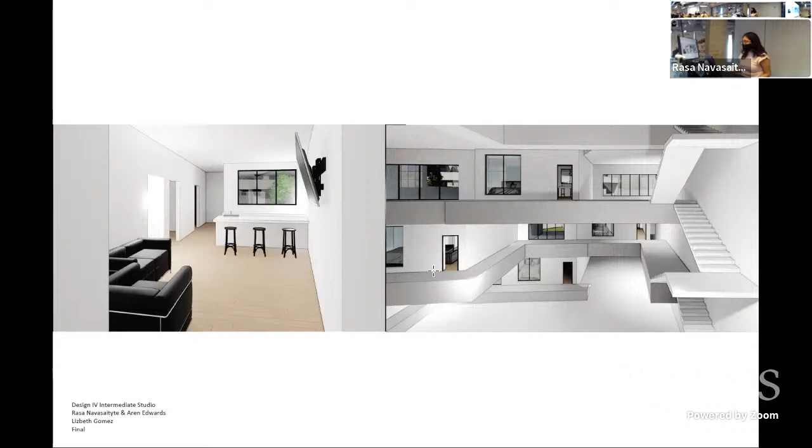The cave, is that the cave? Yeah. Don't call it a cave, find a nicer way of talking about it.

When I saw the model, I was like, oh, that's cool, you can see the kind of diagonal between. I wouldn't make a thing of it, but I don't think you need all the holding space. You can get a lot of sunlight and all that, I think you should have done away with it. I think this is nice, I don't know how structurally it's going to work, but this is nice.

Maybe you build a frame that is really robust, and then you put the things inside. But I don't think you need it, especially if you have these lovely spaces outside. I'm not going to go back into that big room.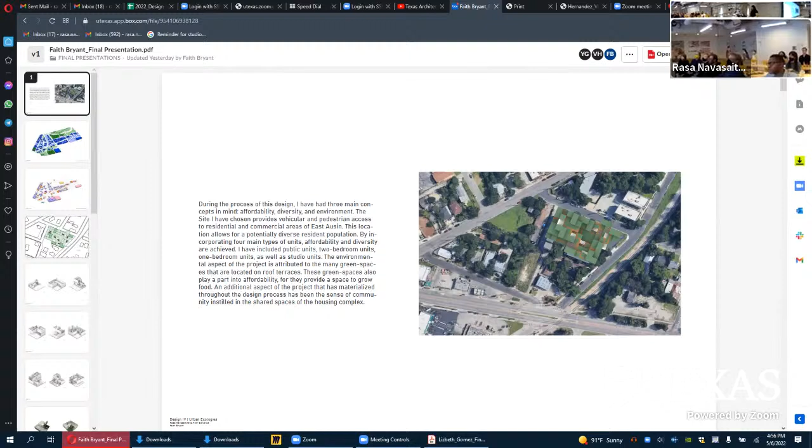We got a little bit of a late start. Second half. Is that your real name? Xiomara? Yeah, so nice, thank you. Oh Lennon, that's okay, she didn't do the slide. Except you changed her name. Okay, next slide. Is it Portuguese? Is that pronounced in Portuguese? I don't know where it originates from, but I'm Salvadorian, Central American. Could have been Brazilian, but... Wait, so it's... Yeah, I've heard it as a Brazilian name before. Has anyone ever met anyone named that before? Say it. Okay, okay, we're ready.

All right, good afternoon. My name is Xiomara Andrade, and this is my final presentation for urban ecologies.

So first off, I just want to start with the reasoning behind picking a site and the kind of project that I wanted to create.

Just like before, we've been talking about the programmatic density of 7th Street. My transect of 7th Street was the one right alongside I-35. So it was really interesting. Most of the other transects, the north side is a lot more residential, and this one still is, but there's a mix of other businesses around the north side just because it's so close to the highway.

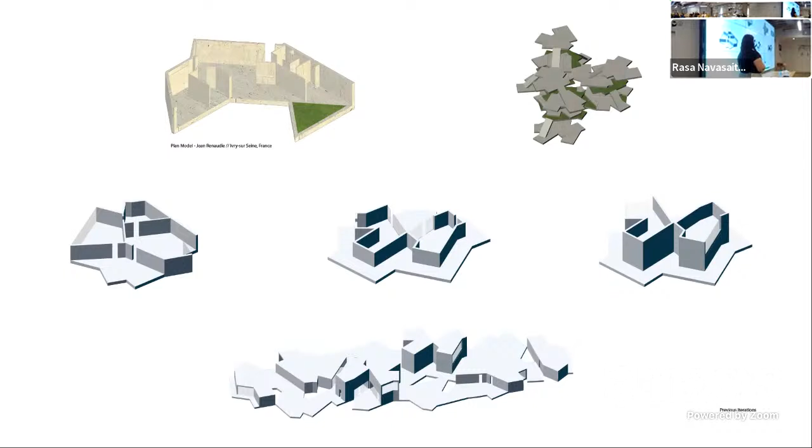And then the unity model on the far end, on top, was created from different plates stacked together, just seeing the pushing and pulling of those plates. From those plates, I created my own floor plans derived from the initial one with angled walls, but it became a little too much once you put them together. It was really hard to connect them and make sense of them because they were a little too random.

So from that, I went back to square one and just played with rectangles, running those rectangles together to make new floor plans that would make better sense when joining them together. These are the three floor plans that I have in my unit, except this part on the inside is no longer how it looks, but that was just the initial concept.

And then that is the most private space. It's a 1-bedroom, they're all open floor plans. That's like the bigger one. These are all more studios, and then we share a common balcony and a common kitchen.

Initially, I stacked them up together to create some sort of wall barrier, but that was too closed off, and that was not the point of what I wanted to create. I wanted to create something inviting that made people want to explore more around the site and the surrounding businesses.

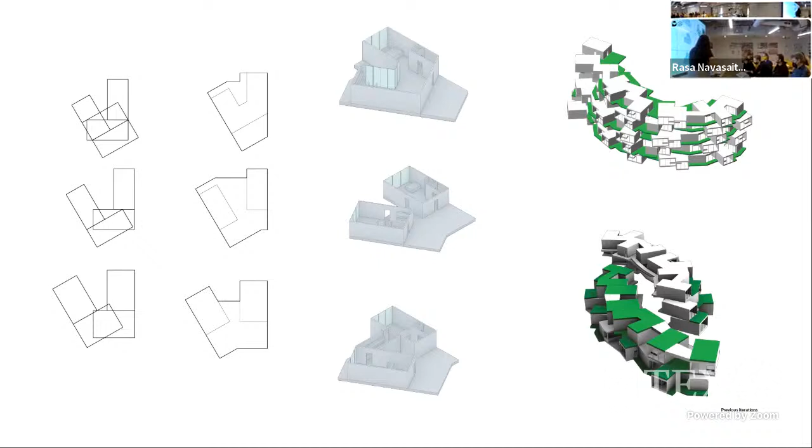So then, after mid-review, I developed this other one, made of two curve shapes using the same units, but it was still too random and chaotic, because the shape itself is already random enough. It didn't need to be too random when stacking them up together.

So I started to create a rule for them, and basically they would just get pushed back more and more, and that created this building. This is the floor plan, the first floor.

And here you can see those same units. It was just shifting them to create that curve, so it's not too messy and I could create pathways. The curve comes just from the shape that they created together.

And then I made gaps in between just for access points to the streets. And then in order to bring people into these places, I placed kiosks, kind of like for something quick to eat, like a quick coffee, just to bring people into the space and make them want to travel around and see what's more out there.

And then for these access points, there are more private ones, so they're smaller as well, and that's where the circulation goes up on top. This is the next stacking of the plates, and they're just shifted 10 feet back.

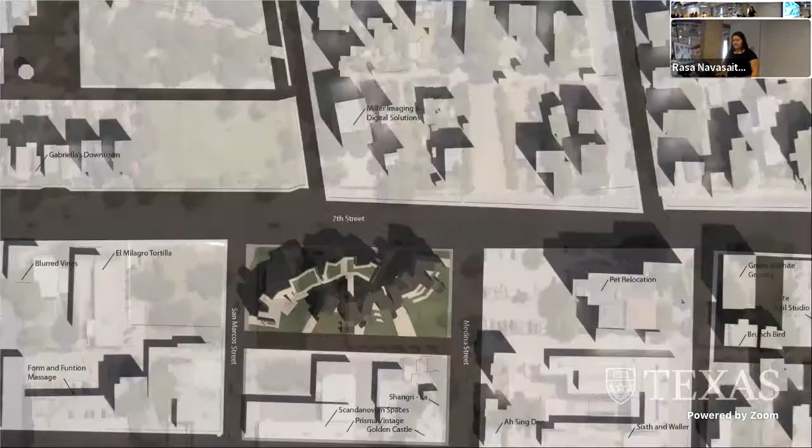And then this area is more for any kind of events they want to create, like barbecues, or a place with different benches, just for seating and lounging in those spaces. And as you go up, you see the change in color, which is just the change in level for the green spaces. And this is my site plan.

And in this site plan, I included different businesses around the area, which are one of the main driving factors of this project, because I wanted people to be able to get through it and experience different places—some people here, some people there, some people down here. So we were able to create that effect easily with the openings that were created.

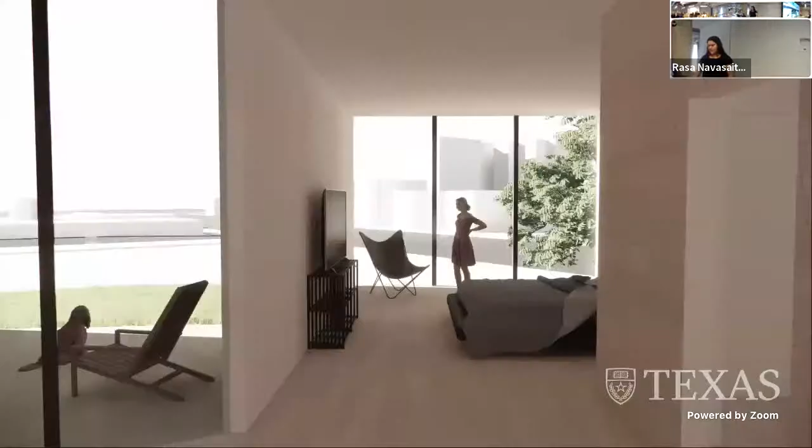And then this is kind of what you would experience on the inside of the bigger unit. It's a very big open space, it feels like, although it's just, I believe, 500 or 600 square feet. And then this is from the rooftop, how it would be experienced by everybody at the same time.

And how you could see the bridging moments over there on the far end, kind of interacting with each other and speaking to each other. And then this is just a shot from one of the unit's balconies—you could see through the inside, and it's just a nice moment to experience as well.

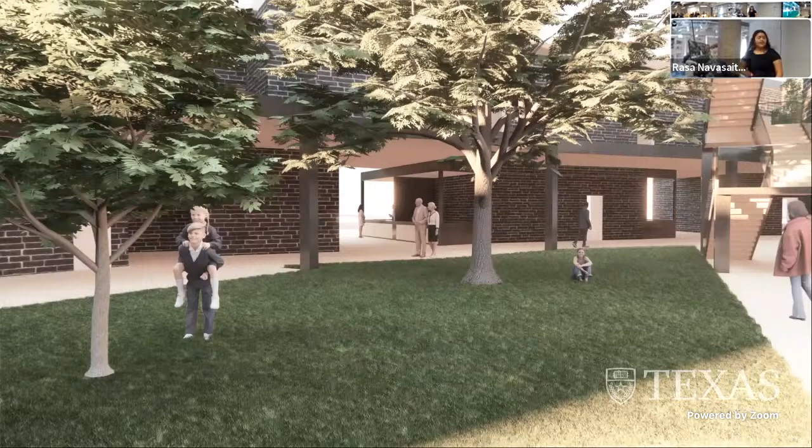And then here are those shops that I created to attract people inside and experience the space, not just for the residents, but for other people as well. It kind of wanted to create some sort of park environment that was inviting.

And in the sectional model, or in the section cut, those cut the short side, so it was cut right here to show how the bridges are interacting with each other, and how the units repeat back, so it just kind of gives that modular effect to it for cost effectiveness, but still creating unique spaces for people.

Such as you see, there's no balconies in this area, but over there, with that pushback, there were balconies created, and there is enough social space. So right here on this floor, there is no balcony, but over there, you can see that there was a balcony created from that pushback. And then, you see...

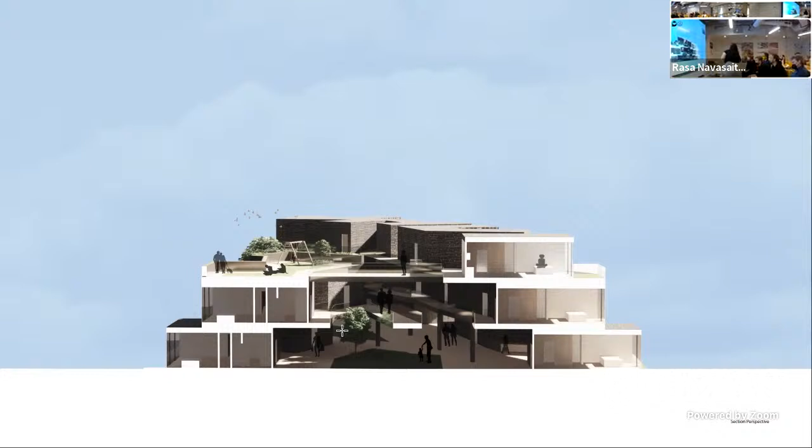Yeah, like this here, these sort of join, I want to know what this is. Here, it's a bridge. There, it's a space, so you have these two things. So what happens in your mind? What is the importance of the thing in between? It's almost like a hinge. Yes, so sometimes it's solid, sometimes I'm just not quite clear what the dimensions about the hinge are.

So this is one unit and this is another unit, and because of creating different pricing ranges with people, some units will share the balcony space, so this is the green space of that balcony, and then this unit... that part is just decking, so it's not all grass. Next to them, next to the next, and then this room was created just because there is a gap in between when we keep building up, and it was, I created this one and that one, this one and this one, and these are for the amenities. It would be like, if they wanted a studio space there, or they wanted a gym space.

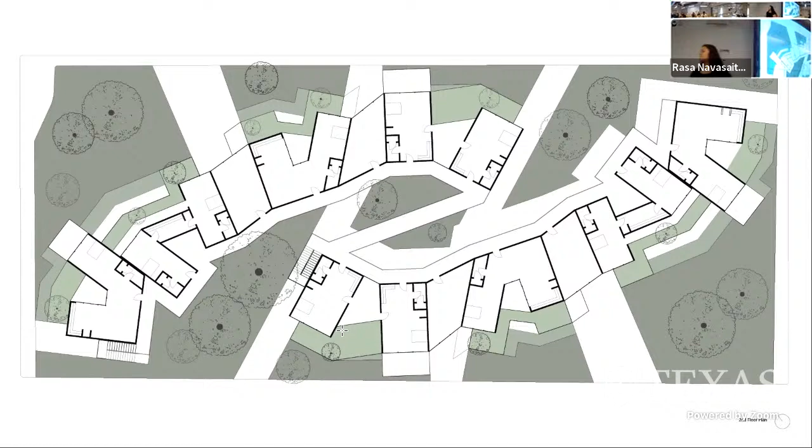Be careful with your words and what you use, because then they'll come back and say, well, why are you related to businesses out there? But can we also see the relationship of this in a site plan, to see where the streets are? Yes, what is this, a busy one? And that can begin to give you...

Okay, so that's 7th Street. So you're really opening this out toward 7th Street.

Seems like it should be a clear courtyard typology. There's something very suburban about it, with too much green on the edge. Which is fine, but this is not - you're trying to go dense. So think about how you encounter the edge, so that you have the curves happening.

It's informed by, I think, this macro curve. So it could be nice if maybe they were bent - thinking about the way the bends are happening in relationship to the streets.

This model is really beautiful, that part. I think you have two projects going on - one is really good, the other one is actually pretty bad. This is great, this is nice. But if you look inside, it's like, oh man, you got this long overhead plane, right? And then you have a small opening. It's going to be dark.

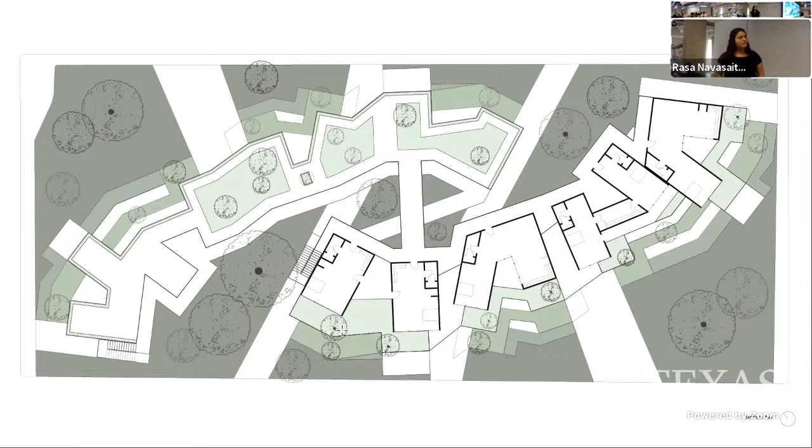But like Smitty said, it's not like you see a box and then stick something in the corner, taking a bite out of the apple. Leave the apple. It sort of makes it L-shaped, and it looks like an afterthought. If you can find another way to do it, study a lot of really good versions of how people have figured that problem out.

It could be nice if this thing were straight, and I see it's beautiful on one side how it stacks back, but if it's straight I think you could solve some problems with maybe what I talked about previously, how the darkness is happening on the inside. There's something quite nice happening, but I don't think you're taking advantage of it, and you should.